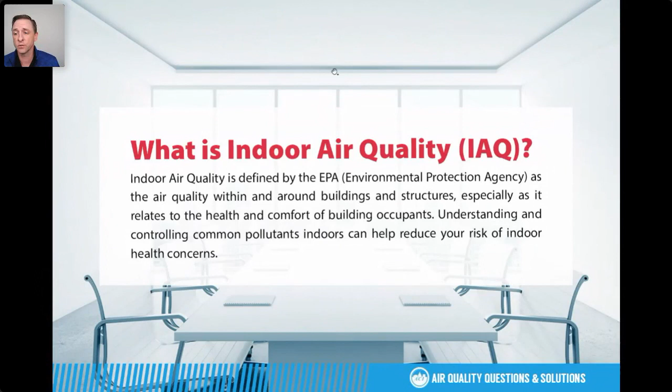So why is measuring and controlling indoor air quality, or IAQ for short, important? Essentially, why are we here today? In addition to the occupant safety, health, and comfort mentioned in the EPA's quote, there's a few other important factors in controlling indoor air quality.

The first one I'll talk about is what I'm calling occupant confidence. As we look around, there's a lot of commercial buildings that are vacant or at very low occupancy rates. Schools, shopping centers, these buildings are vacant or nearly vacant. So going forward, as we move past COVID hopefully, how do we instill confidence in people to re-enter and reoccupy these buildings? Controlling and monitoring indoor air quality can be a major factor in people being confident to go back to an office, a shopping center, a movie theater, or schools reopening.

Another major reason for measuring and controlling IAQ is regulatory compliance. We've seen that a number of states have codes and regulations in place for CO2 monitoring. A recent bill just passed in California that will go into effect later this year. And it wouldn't surprise us if VOCs or other air quality metrics become part of local building codes or even statewide or nationwide regulations. So it's important to be proactive, to be ahead of the curve, when or if regulations require indoor air quality control or measurement.

So what's in your air? Let's take a quick step back to junior high science class. You're going to see typical common non-toxic and inert gases, critical ones like oxygen and CO2, as well as others like nitrogen. You also have particulate matter that forms a portion of our air, including combustion from coal and gas power plants, vehicle exhaust, and wildfires that we had last year that started in California. The particulate matter and smoke from those fires reached pretty much the entire continental U.S. We could see it here in Wisconsin — there were several days you could see it — and it went as far as the East Coast as well.

Also, you have microbials such as viruses, bacteria, spores, pollen, dust, and other allergens. The toxicity of those varies wildly, but there's still a matter of comfort and safety. We all know that pollens and mold and mildew, while they might not be lethal as some viruses and bacteria could be, can still go a long way to causing discomfort.

And then another thing that's in our air and a main focus or factor in controlling indoor air quality is VOC, which stands for volatile organic compounds. That's been a major talking point and item of discussion in regards to indoor air quality here in recent months.

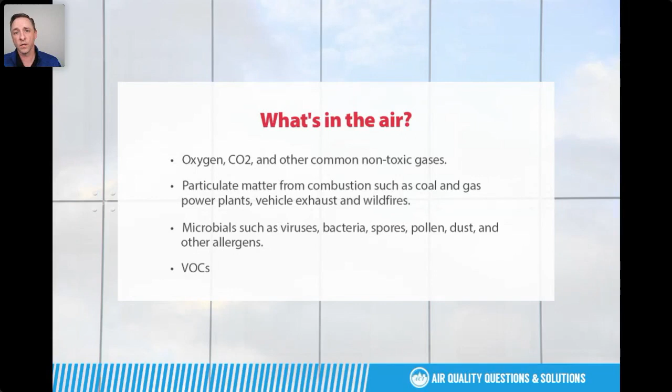We'll talk here for a second about the effects of poor indoor air quality. They include both short-term and long-term effects. Short-term effects can make an occupant feel like they're sick or have allergies — things like dizziness, headache, fatigue, loss of productivity — and increased absenteeism due to these illnesses can result.

And that's a key. The increased absenteeism is a key thing to remember. What I was saying a minute ago about occupant confidence and getting people to come back to these buildings once we're past COVID. Also, poor indoor air quality can exacerbate other medical conditions or allergies that people may have.

Long-term effects of poor IAQ are still mostly unknown. There's been a number of studies done and a number of studies ongoing, but this focus on IAQ has been very recent, within recent months or years. So some of the long-term effects may include respiratory and heart disease. It may include things such as cancer. We don't know these things for sure yet, but more research is ongoing and will be released in the coming weeks, months, and years.

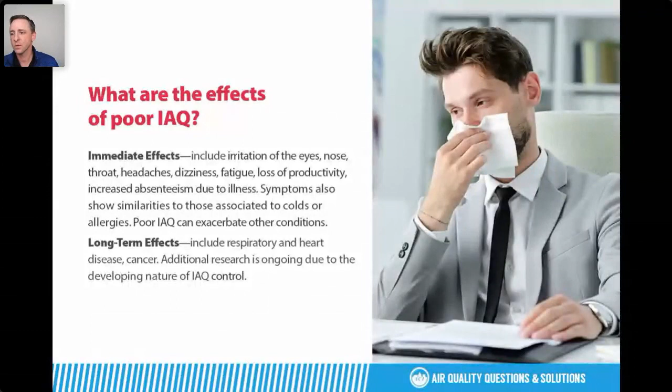At present, there's not a global standard for indoor air quality. There are several states, countries, and organizations that have published guidelines for VOCs and what they consider safe, and that's what's going to show on the next screen here. I'm not going to go through these one by one, but what I will point out is that you can see a dramatic difference in what a number of these organizations and groups consider safe levels for VOC measurements.

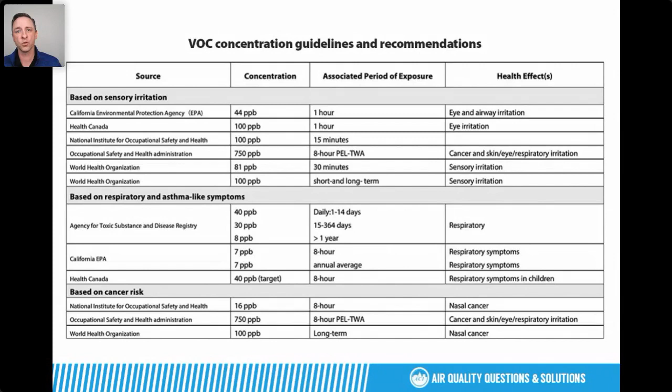I'll note that there's no outdoor air baseline measurement for VOC like there is for CO2. So when it comes to VOC measurement, there's no global standard and there's no outdoor air equivalent or outdoor air baseline measurement. So when it comes to VOCs, it's generally accepted that the lower they are, the better. But unlike CO2, there's no outdoor air baseline to compare it to. But you see on this slide that there are a number of organizations and states and other countries outside of the United States that have set some level of standards for both short-term and long-term exposure to VOCs.

Looking at the causes of poor IAQ, we mentioned some of the sources. Some of the additional causes or sources include combustion appliances that are internal to a building, furnaces, heaters, and other devices like that, tobacco smoke, building materials such as insulation, paint, flooring, upholstery, carpet. These things, when they're new especially, can off-gas or emit VOCs that can cause irritation. You have chemicals that are used for cleaning, as well as personal care, cosmetics, hygiene. Essentially, anything that has a smell is likely to be emitting VOCs.

Also, high temperature and humidity levels can be a cause of poor indoor air quality. And then also occupancy. The more people you put into a space, generally, the lower the indoor air quality.

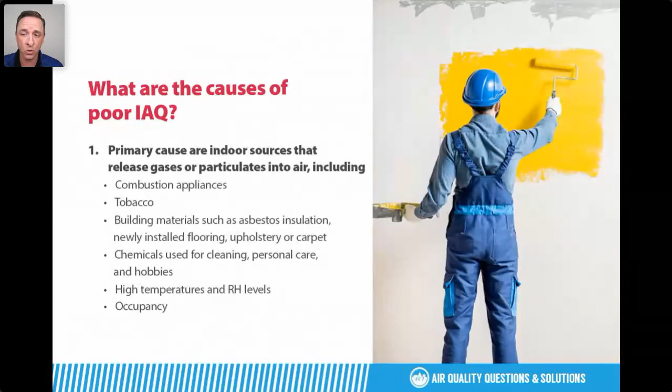Some outdoor sources of poor IAQ are, in addition to what we mentioned a few minutes ago, things like radon, which is naturally occurring and seeping from the ground, pesticides and other chemicals, and also outdoor air pollution such as smog and smoke. Generally speaking, poor IAQ or poor outside air is more common in urban areas, but it's not always the case, because if you go into more rural areas, you see there can be a lot of residential wood-fired stoves and boilers that can cause smoke and put particulate matter into the air. So it's not just a matter of urban versus rural. There are a number of rural areas that do have high particulate counts.

The last thing we'll talk about as a cause of poor IAQ is inadequate ventilation. The air exchange rate is too low. I mentioned demand control ventilation here because a lot of buildings operate under demand ventilation. When occupancy rises, there will automatically be more air cycles. However, occupancy can be separate from indoor air quality because of these sources we mentioned over the past few minutes. Poor outdoor air, cleaning chemicals and building materials can also be a cause of poor indoor air quality that's separate from just occupancy. So demand control ventilation definitely helps improve indoor air quality, but it's not the only solution.

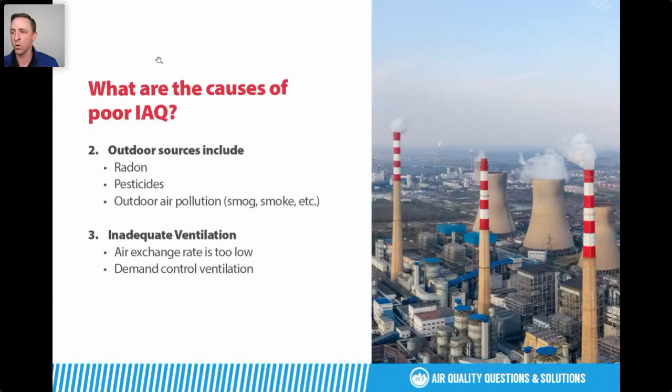So speaking of solutions, we'll talk for a minute about some things being promoted out there in the marketplace. Many of you may have seen these or be familiar with them. The first one I'll mention is things like air cleaning, disinfection techniques, UV irradiation, ionization, and others. One of the benefits of these is that they can help reduce some of the microbials. They can kill viruses and bacteria. But one of the disadvantages is that it may not reduce CO2 and other gases or particulates that are in the space. So that's just targeted specifically towards things like microbials.

We also have, as a solution, increased filtration. The benefits of that are they can reduce some of those particulate matters that are in the space, as well as potentially some of those microbials.

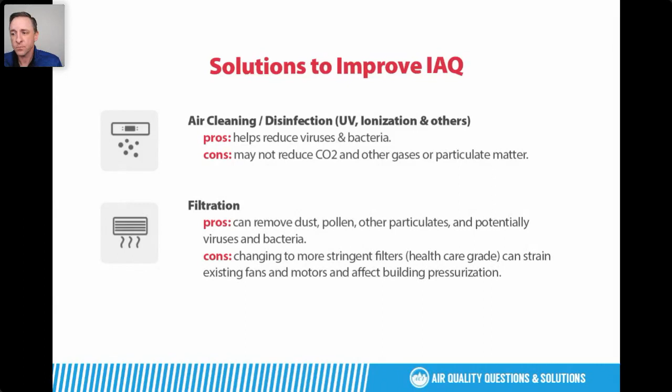One of the disadvantages of that is your system might not be set up to handle a more strict filtration system, and it doesn't filter out or control occupancy. It's not going to filter CO2 and some other gases or chemicals in the space. It's more towards the particulate side.

Controlling humidity can also improve your indoor air quality. It can also reduce energy costs and reduce the spread of microbials. But the negative side of just improved humidity control is that some building materials might not be designed to handle higher or lower levels of humidity, and higher humidity could cause mold growth or degradation of those building materials, as well as increased equipment costs.

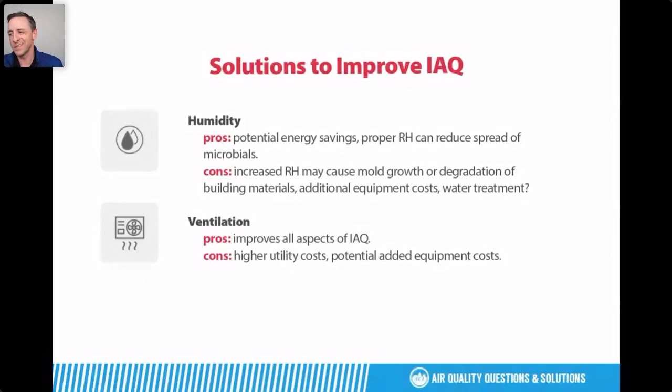The last solution I'll mention is increased ventilation. Bringing in more outdoor air improves all aspects of indoor air quality. However, there are negatives with that as well - higher utility costs, and in all likelihood most systems aren't set up for 100% outdoor air, so there's going to be additional added equipment costs.

So in summary of the solutions, there's not a one-size-fits-all solution for improving indoor air quality, and we'll talk about that when I conclude the presentation in a couple minutes. But now we'll mention some of the product solutions that ACI has that can help control and improve your indoor air quality. We've got products across multiple lines: temperature, humidity, pressure, current, gas, and air quality.

Specifically on temperature and humidity, into all configurations - room, duct, outdoor air, averaging, and all other configurations in pretty much any type of thermistor or RTD or analog output. I want to highlight also that we've got BACnet, MSTP, Modbus RTU temperature and humidity sensors.

As we see more of a focus on indoor air quality, we see people want to increase the number of sensing points within a building, and you can't just snap your fingers and add more inputs to your controllers. So putting some of these sensors on your network is a way to reduce equipment costs while increasing the number of sensing points and data you're bringing into your system.

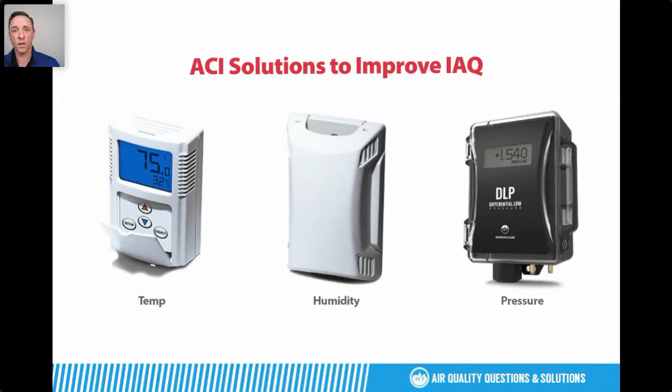I mention that because this device gives you and your customers options to change the settings without having to purchase additional equipment. A number of our products offer that type of selectability feature, so it can potentially reduce the need to purchase additional equipment down the road if you want to improve or change out some of these other systems to improve indoor air quality.

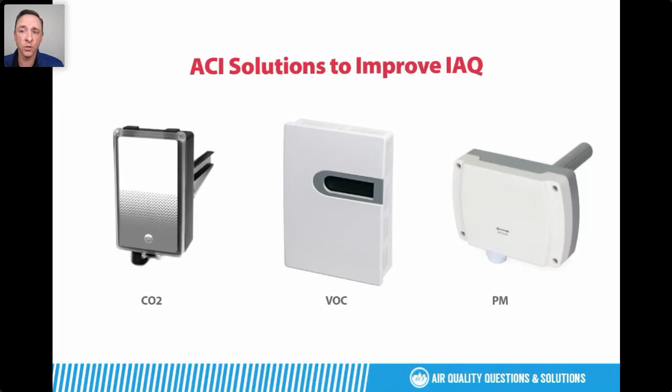In summary, as we look to improving indoor air quality, we have to balance energy efficiency with improved indoor air quality. As I speak to you here in Middleton, Wisconsin, it's about 4 degrees outside. If we were to throw the outdoor air dampers open and bring in 100% outdoor air, it's going to send the utility costs through the roof, and our system can't handle 100% outdoor air when it's 4 degrees outside. So that's the balancing act in improving indoor air quality.

As we mentioned before, increasing ventilation is the only proven method to improve indoor air quality across the board, both microbials like viruses and bacteria, as well as improving CO2 and reducing the particulate matter.

Post-COVID, how do we ensure occupant safety, or occupant comfort? We have to encourage people to come back into these buildings that are vacant now, our offices, our schools, our shopping centers. Improving and documenting that we're controlling the IAQ in those spaces can go a long way to ensuring employees, customers, and students are comfortable and confident being back in these spaces, as well as preparing us for what could potentially be some regulatory requirements down the road.